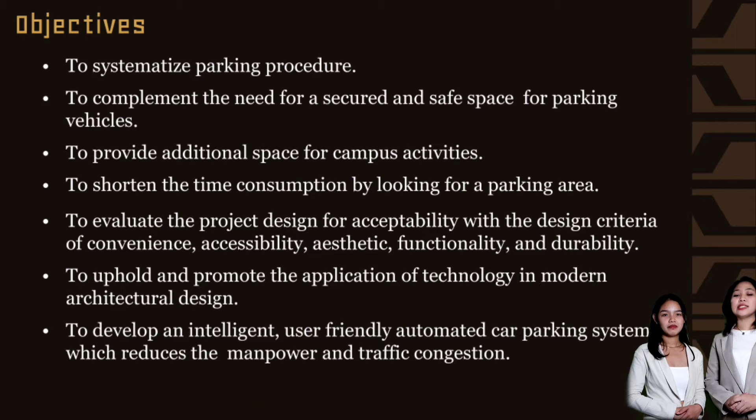Additional to our objectives are to evaluate the project design for acceptability with the design criteria of convenience, accessibility, aesthetic, functionality, and durability. To uphold and promote the application of technology in modern architectural design, and to develop an intelligent, user-friendly, automated car parking system which reduces manpower and traffic congestion.

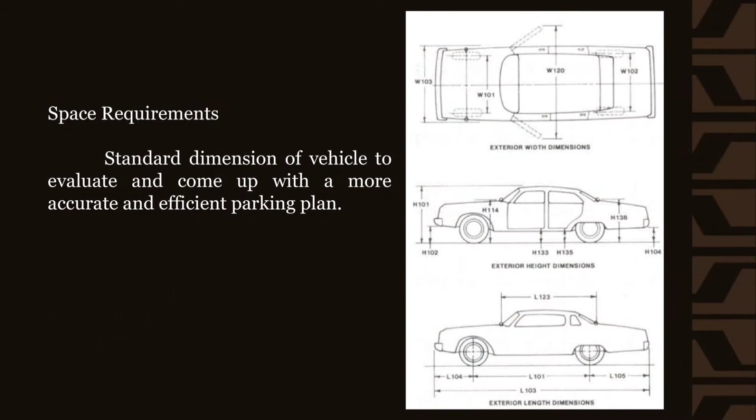On our literature review, we have found related studies and articles defining multi-level parking as a building which contains several levels of floors, normally developed with the sole aim of ensuring there is parking for automobiles, according to Radhika Dahani, 2016. According to Carsten J., 2018, smart parking is a parking system and solution that can include in-ground smart parking sensors, cameras, or counting sensors. Here's the car dimension we used as basis for parking space requirements.

For our methodology, we have the following steps: first, identify the problem; second, define objectives of a solution; third, evaluation; fourth, develop and design; and lastly, prototype demonstration. For our project description, Biyahe Garahe is a multi-story smart parking solution specifically designed for the Technological University of the Philippines, Manila.

This multi-story smart parking system is intended for the basic variables such as restricted space, availability, safe and secure space for vehicles, and will help widen the roads, sidewalks, and space inside the TUP Manila campus for activities. This edifice also strives to shorten the time consumption of looking for a parking area.

Through this parking system, every individual with a vehicle that has a purpose to enter the university premises will have a space for their vehicle and will provide a systematized and convenient parking experience via its technology. Also, every stakeholder of TUP Manila will benefit as the campus will have its space maximized and pleasant.

The Biyahe Garahe, a multi-story smart parking solution, will benefit the students, faculty members, employees, and visitors of Technological University of the Philippines, Manila.

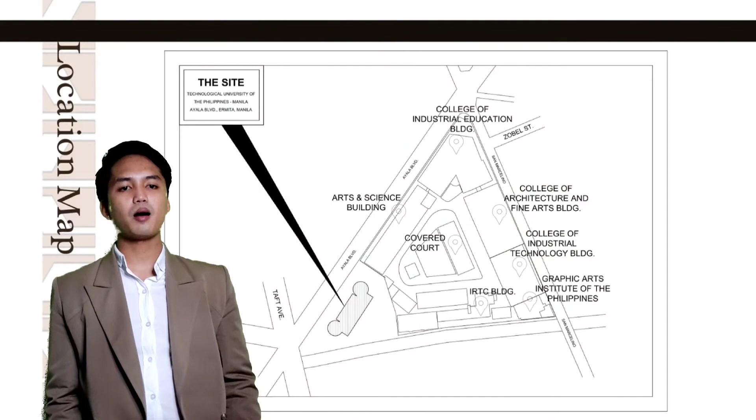The location of the Biyahe Garahe, a multi-story smart parking solution, will be inside the Technological University of the Philippines, Manila campus, with its entrance and exit gate facing Ayala Boulevard.

Site Development Plan. The researchers' proposed multi-story smart parking system solution is specifically designed for TUP Manila, considering critical factors such as limited space, accessibility, and how it affects the people inside the university. Through this parking system, students, faculty members, employees, and visitors will have space for their own vehicles as well as a spacious campus environment, therefore resolving the problem of the lack of parking space in TUP Manila.

The tree-branch pattern is used as the design concept for Biyahe Garahe Smart Parking. The reason behind this concept is the designers want to build an impression to the people, most especially to the TUPians, that the design is derived from nature, which is usually loved by them as it creates harmony between people and nature. Aside from that, the designers want to establish a structure that is beneficial and safe for the community and the environment as well.

A smart parking facility that promotes a digital parking system, energy efficient, and sustainable architecture by utilizing renewable energy and with the use of materials that follow function over form.

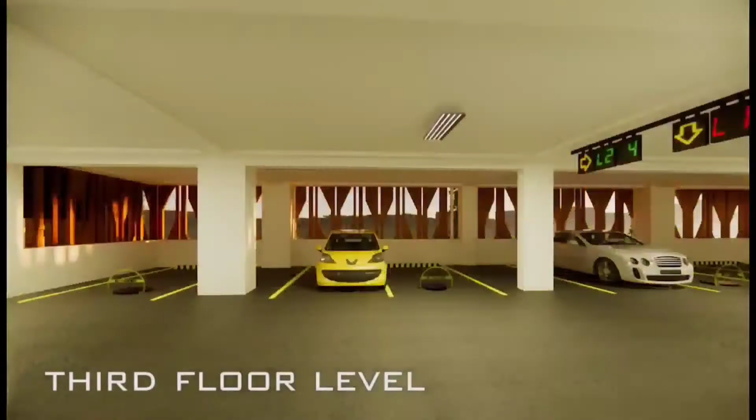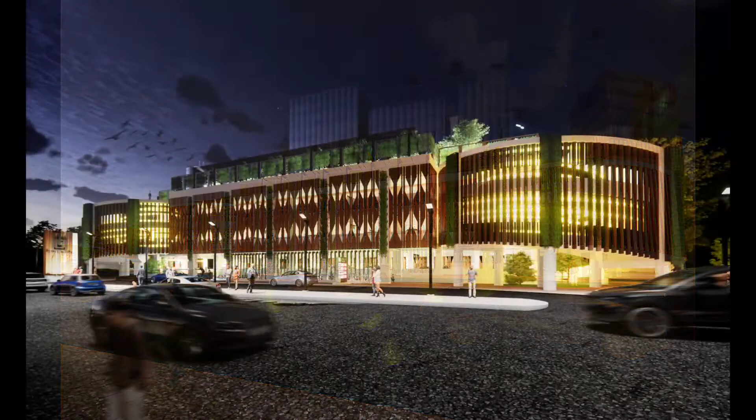These are the architectural plans: Ground floor plan, second floor plan, third floor plan, roof deck plan, roof plan, front and rear elevation, right and left side elevation, section, and daytime and nighttime perspective.

The summary of the evaluation result of the Biyahe Garahe, a proposed multi-story smart parking solution for Technological University of the Philippines, Manila, on the 5 criteria: convenience, accessibility, aesthetic, functionality, and durability. Convenience has a mean of 4.03, accessibility 3.90, aesthetic 4.40, functionality 4.40, and durability 4.67. Overall, the mean is 4.28.

The following videos would be our parking building design walkthrough and a Biyahe Garahe scanner prototype demonstration.

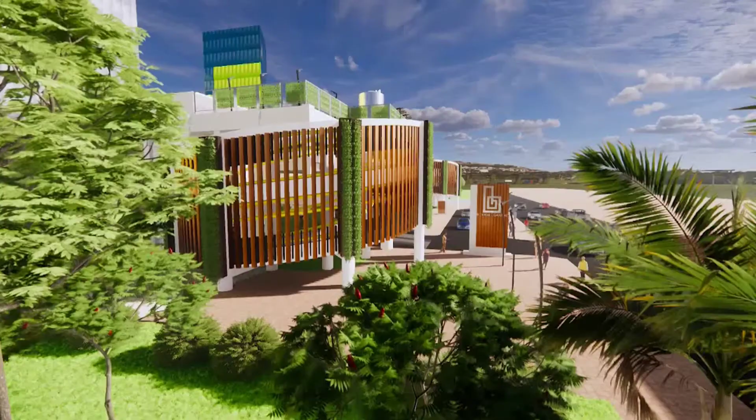Biyahe Garahe is a proposed multi-story smart parking solution for Technological University of the Philippines, Manila.

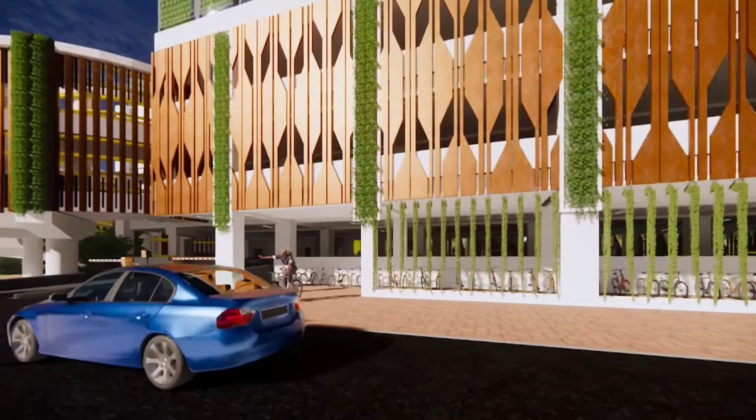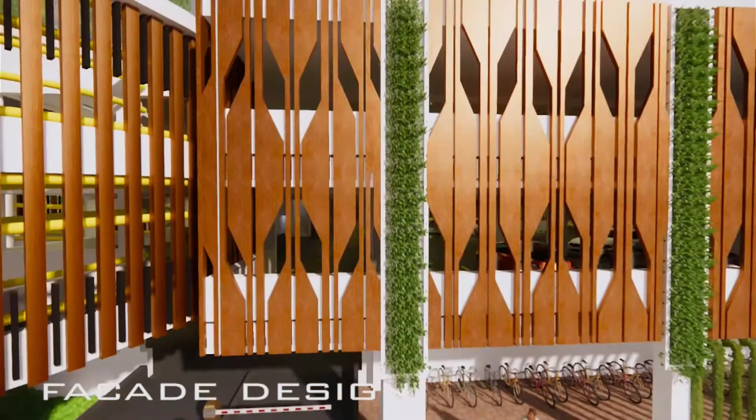The facade design is inspired by tree branches with a light brown earthy color for a cool, minimal, clean, simple, and nature vibe front and back view.

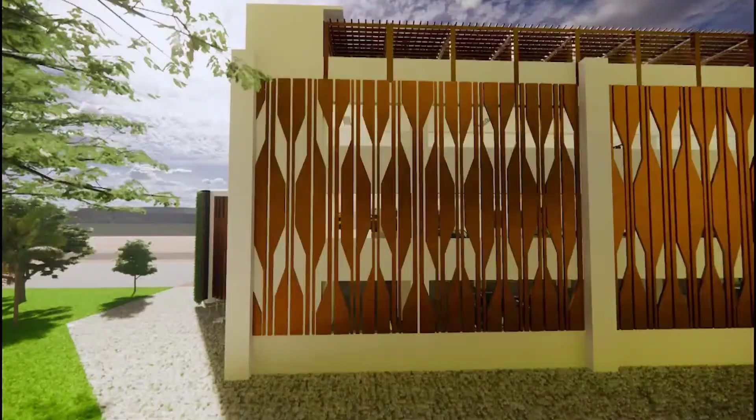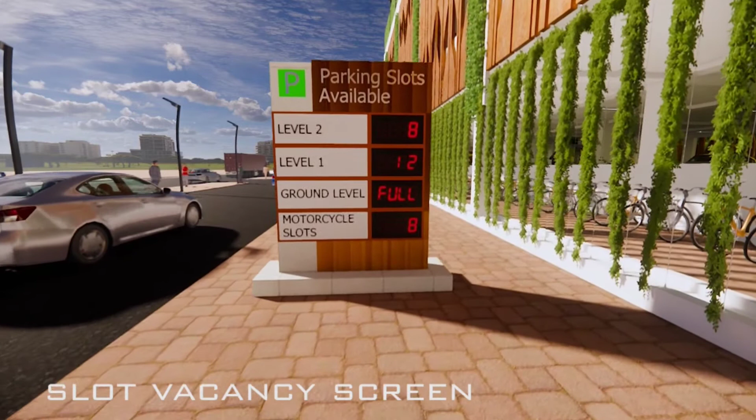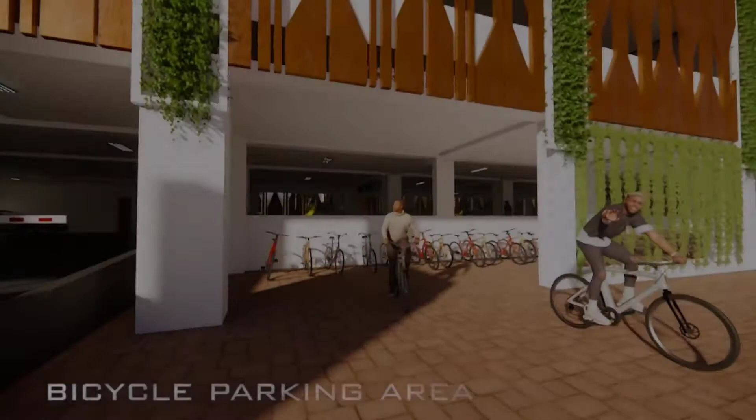On the entrance of the building, a slot vacancy screen lets vehicle owners who are planning to park know whether there's an available slot or if the building is already fully occupied. On the front portion of the building is a parking space specially provided for bicycles.

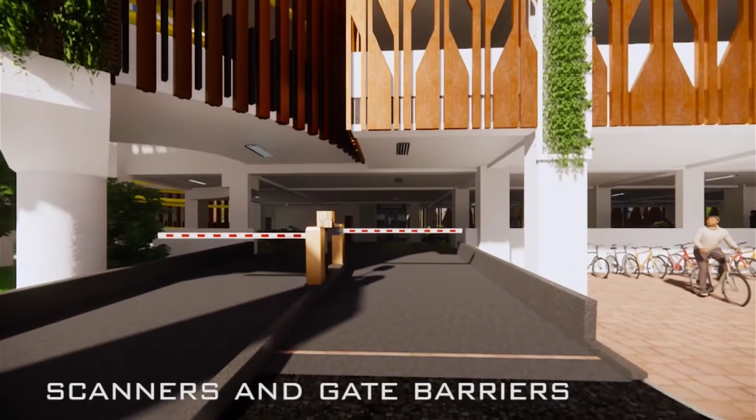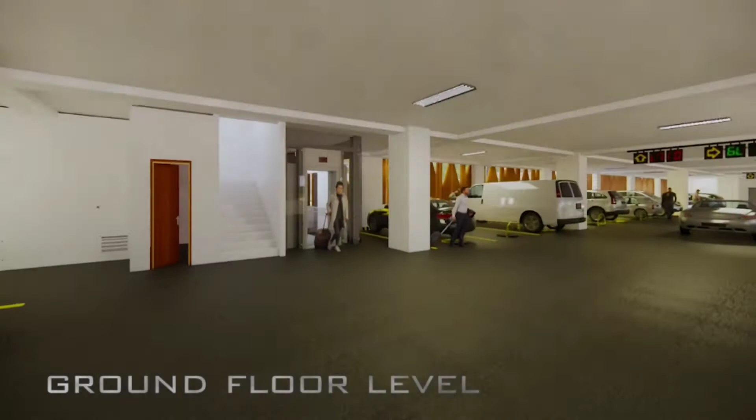Upon entrance, the Biyahe Garahe scanners are placed for the BG card scanning, and the gate barriers will open immediately once the scanning of the BG card is done. The ground floor level is designated parking for motorcycles, students, and PWD users.

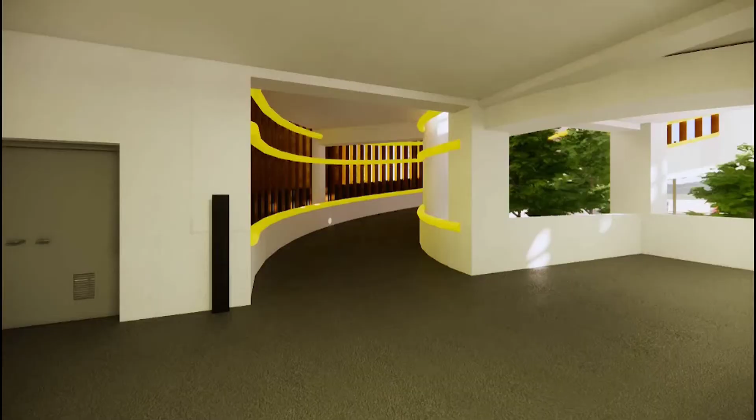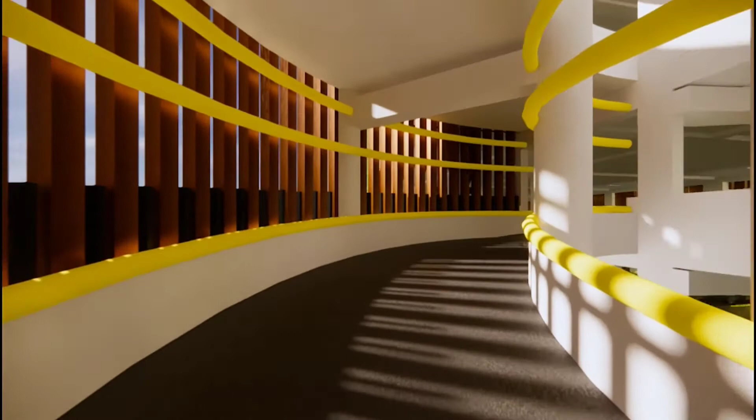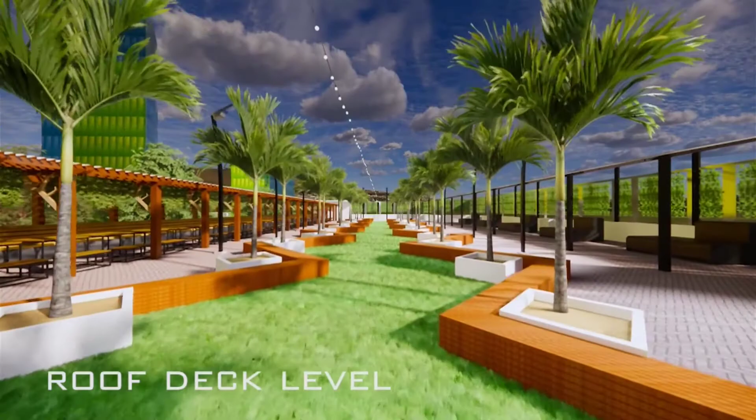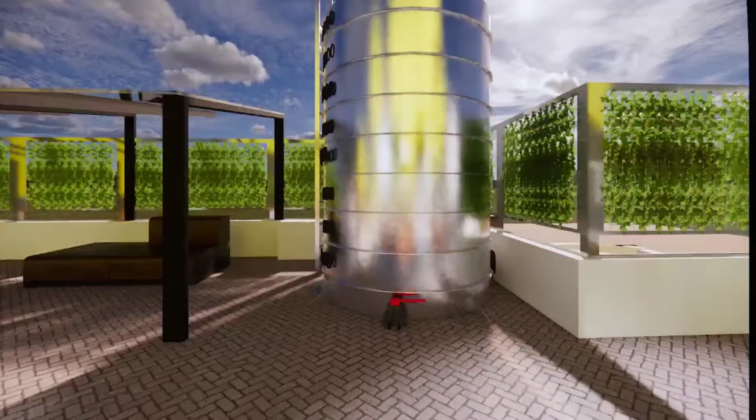On the second floor level, it shall occupy the visitors' vehicles. The third floor level is assigned for the faculty members and TUP employees. The roof deck is a multi-purpose area wherein students, faculty members, employees, and even visitors could visit to enjoy the landscape and sceneries. They can also do some of their activities such as reviewing, meetings, or just unwind.

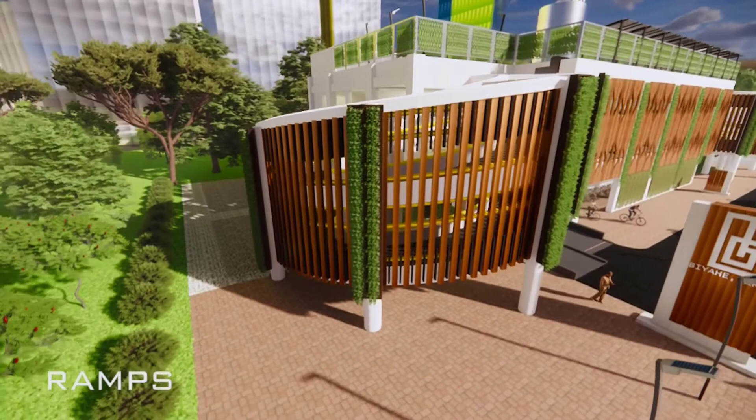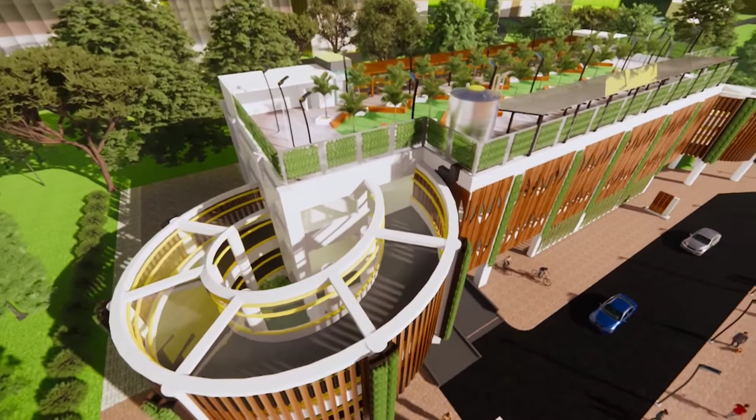The circular ramps complement the form concept inspired by the shape of a car. A circular ramp would help maximize the site space, as well as make it much easier for vehicles going up the building floors, rather than a straight ramp that requires much more vehicle power. It would also provide better traffic flow inside the parking building.

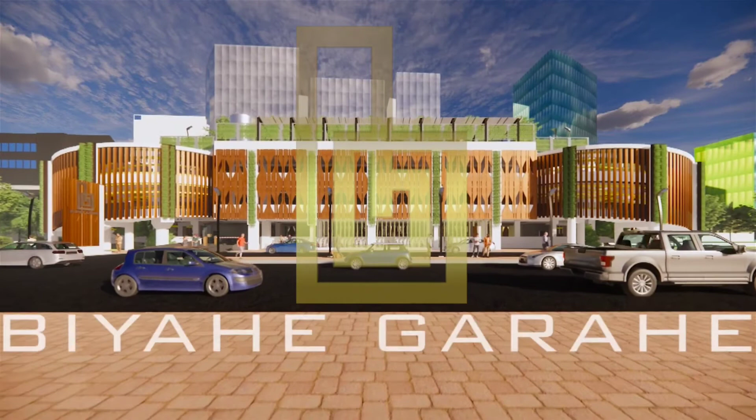This is the Biyahe Garahe actual scaled model. This is how our prototype works.

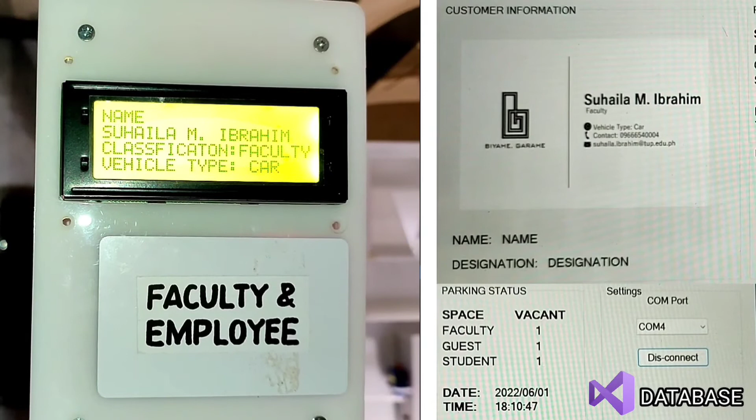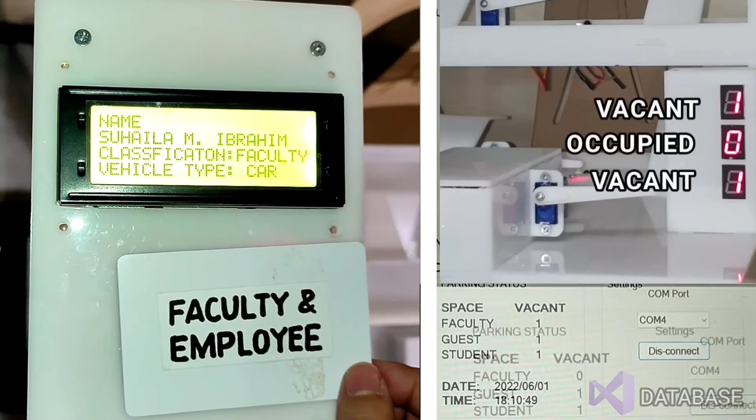After reading the basic information of the owner using the BG card, the BG card scanner will generate a floor level according to the card owner's classification. It will automatically assign a parking slot number that the driver will occupy. The slot number and floor level generated by the scanner will be flashed on the screen.

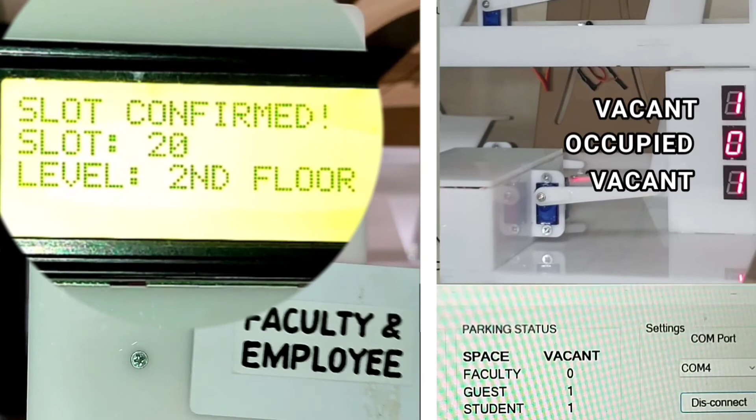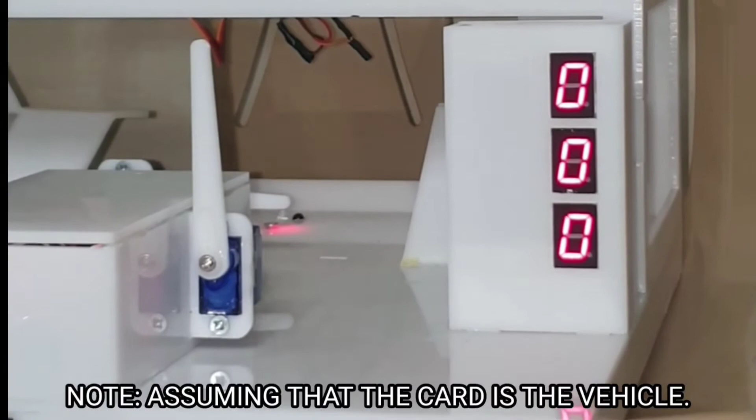The slot vacancy screen will automatically record the new number of vacant and occupied slots inside the parking building. The barrier gate on the entrance and exit area will open to let the driver enter the smart parking facility and park their vehicle accordingly. As the driver goes to the assigned slot,

the individual parking slot barrier automatically unlocks and goes down the moment the BG card scanner generates a slot for the vehicle owner. The barrier will allow the vehicle to be parked on the specific slot given to them.

Upon exit, the driver needs to tap the BG card again. The BG scanner will then record the timeout and automatically program the slot as available again. The individual slot barrier will go back up and be automatically locked to mark it as available. The BG card scanner screen will then flash the card owner's information with the timeout.

We are the researchers proposing Biyahe Garahe, a multi-story smart parking solution for Technological University of the Philippines, Manila.